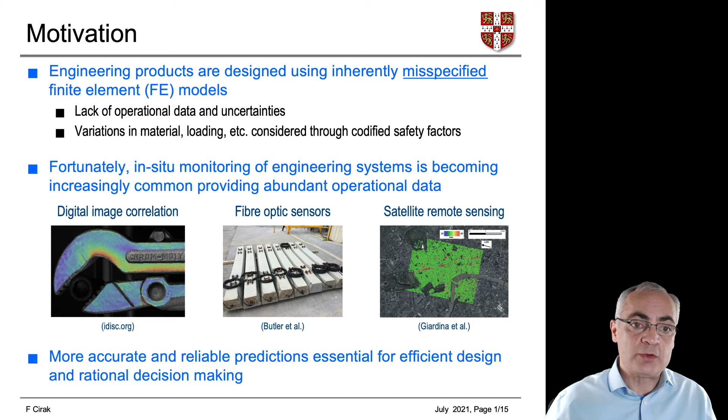Fortunately, we have more and more monitoring data coming from engineering systems in operation. We can use this data to improve our finite element models. In our context, we deal mostly with strain data, which comes, for instance, from digital image correlation, fiber optic sensing, or satellite remote sensing.

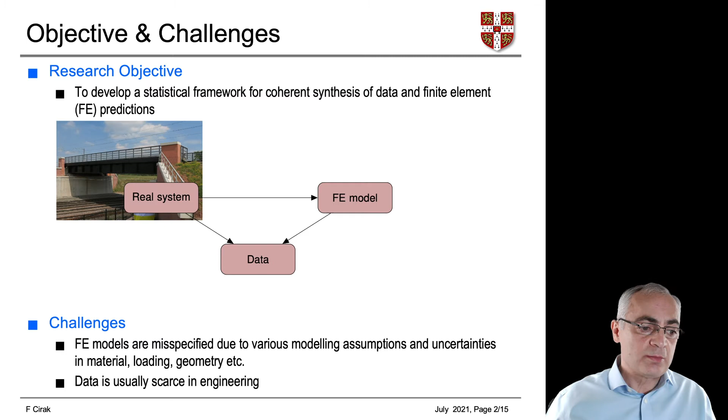The overall objective of our research is to develop a statistical framework which enables us to synthesize measurement data with finite element predictions. We are given a real system, such as the bridge shown here, and a conventional finite element model like those used nowadays. We have data coming in from the real system, and we would like to synthesize the data and the finite element model predictions in order to infer the real system performance.

We have here several challenges. First, as mentioned, finite element models are misspecified, so we have to take this into account. In addition to that, data is usually scarce in engineering in comparison to a machine learning context, for instance.

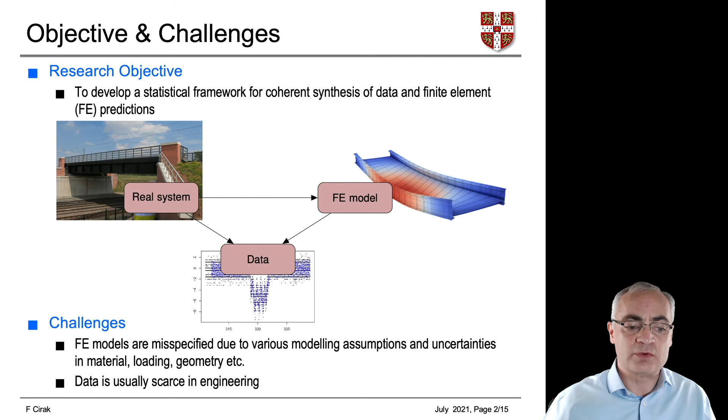We decided to use a Bayesian modeling approach for our statistical framework. This means all uncertainties are represented as probabilities with corresponding probability density functions. We have a probability density function for the finite element solution U. We have data Y with corresponding noise E. We combine both in order to obtain the real system response Z.

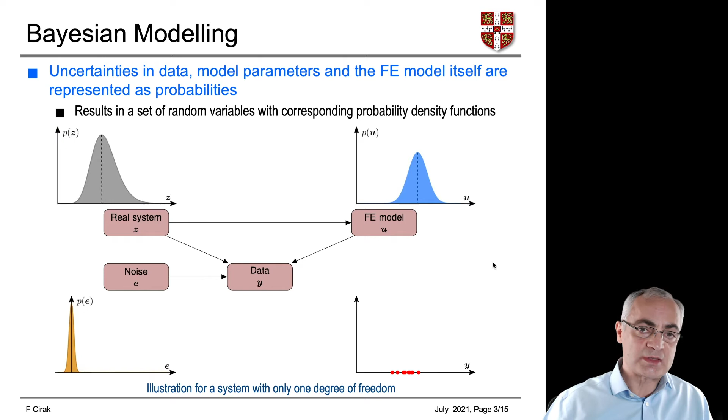First, our assumed data generating model. The data vector Y, which may contain the measured displacements or strains, is decomposed into three components: a finite element component U, a mismatch component D, and a measurement noise component E. In this equation, we have also a matrix P, which projects a finite element solution to a sensor space, and a scalar parameter rho. The first two terms, rho PU plus D, are equal to Z, which is the true system response.

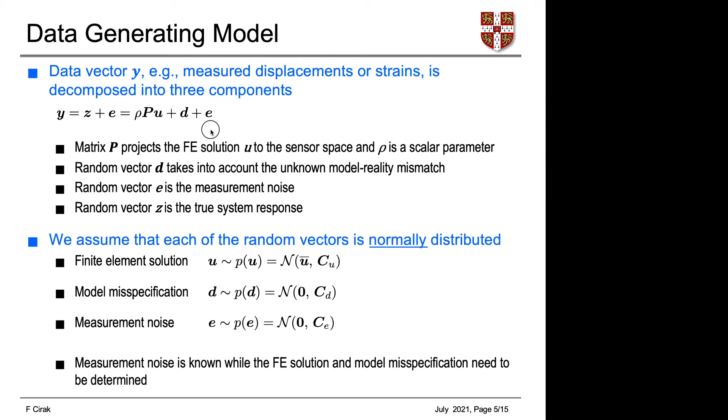The prior density of a finite element solution is obtained by solving a conventional probabilistic forward problem. I have included here a Poisson-Dirichlet problem, which may describe heat diffusion. In this stochastic partial differential equation, the diffusivity kappa and loading F are random. After discretization with finite elements, we obtain an algebraic system of equations. A is here the stiffness matrix. By solving this equation, we obtain a probability density for U, which we approximate as a normal distribution.

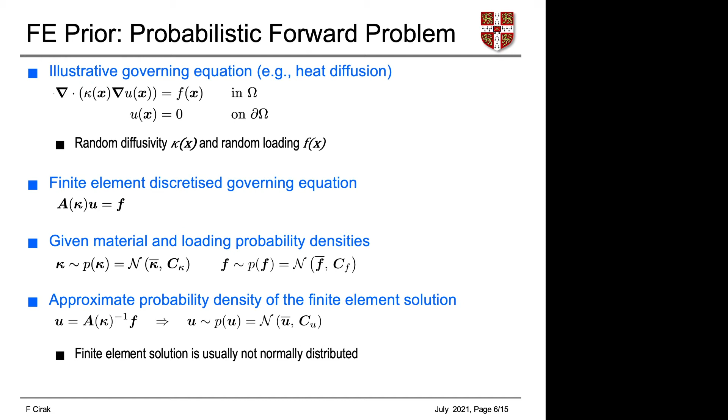Next, we need a prior for the model mismatch. We don't know much about the model mismatch. Therefore, we assume a squared exponential kernel with two unknown hyperparameters sigma and L. We use this kernel to determine the covariance matrix of the mismatch vector D.

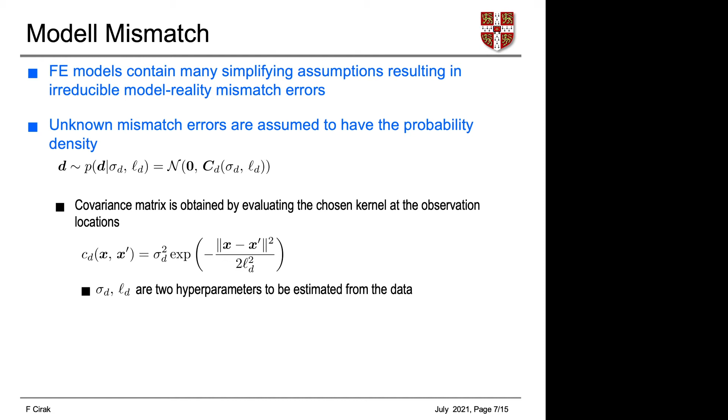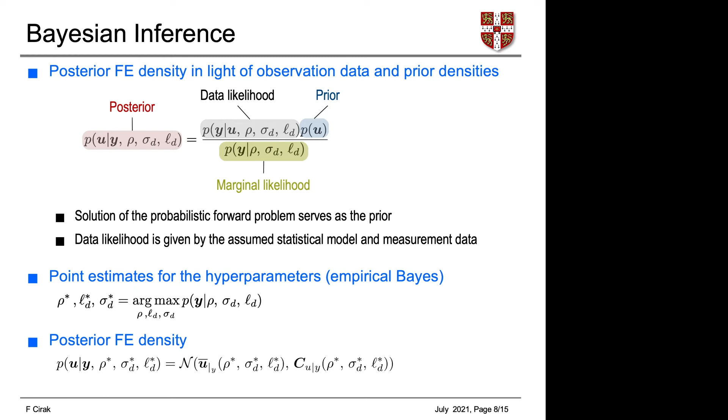After we introduce these point estimates in the posterior finite element density, we obtain our final expression for the posterior, which is a normal distribution with explicit or closed form expressions for the mean and the covariance. I would like now to introduce two examples to demonstrate the application of the proposed statistical finite element method.

The first example is a one-dimensional Poisson-Dirichlet problem with random forcing. Forcing is here a Gaussian process and has the form given here. On the right, you can see the finite element solution. The horizontal axis is the domain, the vertical axis is the solution U. In blue is the mean of the finite element solution, and in light blue, its 95% confidence region. I've included in this plot also an assumed true system density in black.

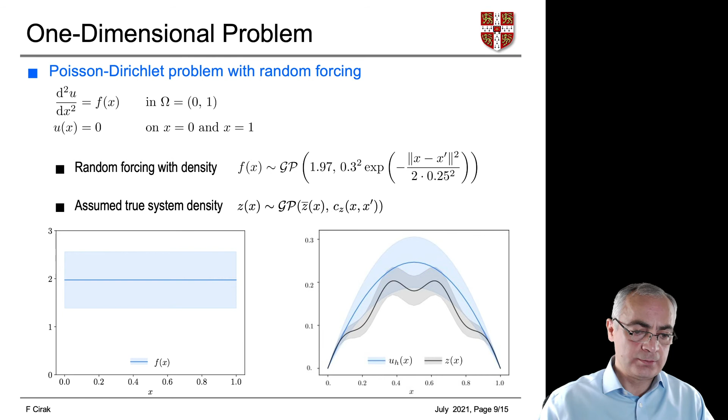We want now to infer this true system density from a limited number of sensors and readings. In each of the four plots, I have different numbers of sensors and repeated readings. In addition to that, I have included in each of the four plots the prior finite element density from the previous page. On the top left, we have four sensors and one reading from each. And in black, you can see again the inferred true system density.

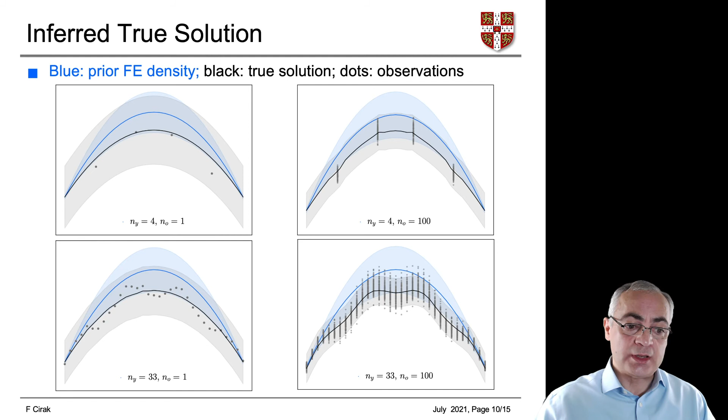The confidence region is very large. We can narrow it down by just making repeated readings from the available 4 sensors. So if we have 100 readings from each, this confidence region becomes narrower. If we increase the number of sensors and the readings, like here, right bottom, you can see that this inferred density in black becomes very close to our original assumed density for the true system.

My next example is an operational railway bridge which is located along the UK West Coast Main Line. This bridge has been instrumented by our colleagues in Cambridge with a monitoring system for measuring strains. The bridge superstructure consists of 2 main I-beams connected by 21 transverse I-beams, which are hidden in this finite element mesh below the deck.

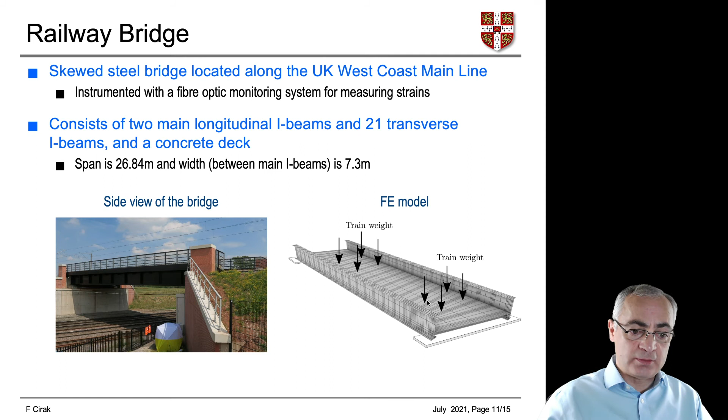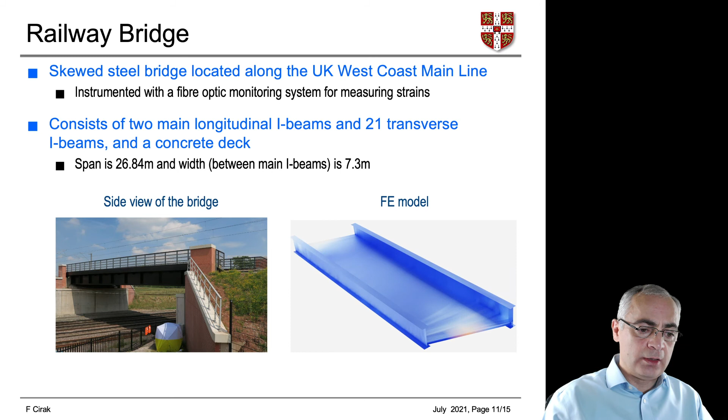When a train passes this bridge on the left track, this leads to the shown displacements, which are of course magnified. The displacement will lead in turn to strains. In the following pages, we will focus on the strains in the main left I-beam. First, a comparison between finite element and measured strains at the midspan of the left I-beam.

Here you can see the strain plotted over time, somewhere at the midspan of the left I-beam. At the top is the upper flange strain, at the bottom is the lower flange strain. The plus signs indicate the measured strains, and the red line the computed finite element strain. We will focus now on the strains at time 1 second, 2 seconds, and 3 seconds, with the corresponding deflected bridge shapes shown on the right.

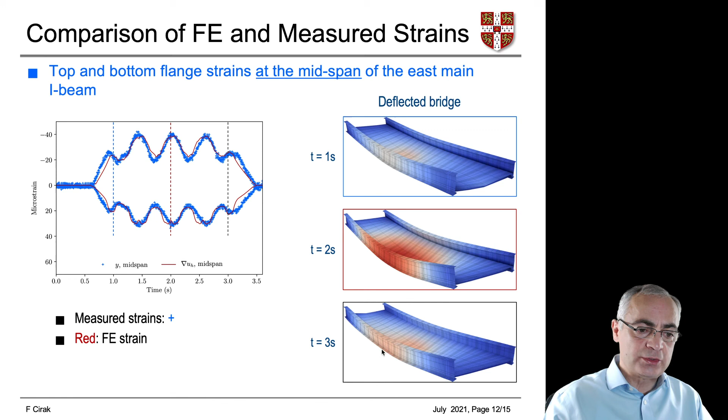So we look at the flange strains along the left I-beam. In these 3 plots, I have plotted the strains. In blue are the upper flange strains, and in red the lower flange strains. In addition to that, we have the plus signs, which are measurements from 40 strain sensors. In black, I have plotted the inferred true flange strains and their corresponding 95% confidence regions. We can see in these 3 plots that the inferred true strains lie between the measured strains and away from the prior finite element strains.

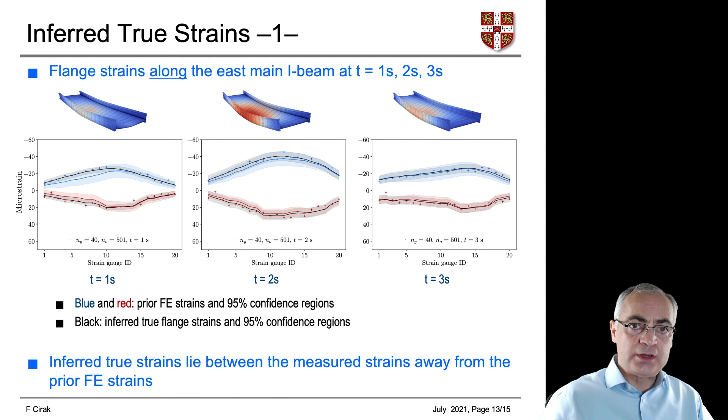Next, we want to study if we can infer this response also with a reduced number of sensors. So the top 3 plots are the same as on the previous page, and the bottom 3 plots use only 10 measurement points. You can see here that the inferred true strains in black are in very good agreement with the inferred true strains with 40 measurements. So this means that we need only a few measurements in order to infer the true strains.

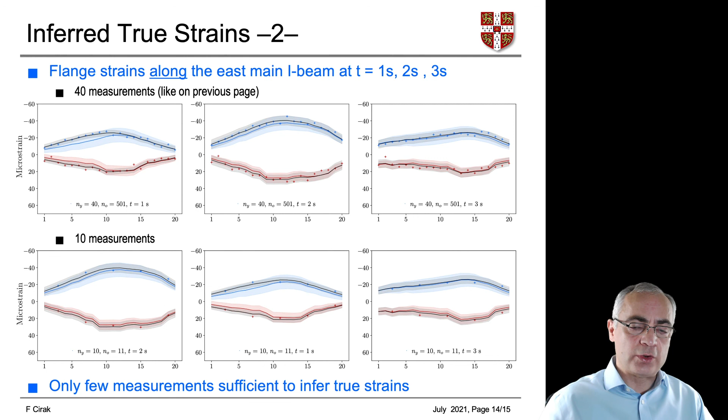As you saw, the statistical finite element method gives us the possibility to synthesize observation and simulation data. In our approach, we take into account all uncertainties in the data, model parameters, geometry, material, and so on. As you saw in the last example, a limited amount of data is sufficient to infer the true system response, and we believe this makes the statistical finite element method ideal as a principled means for creating physics-informed digital twins.